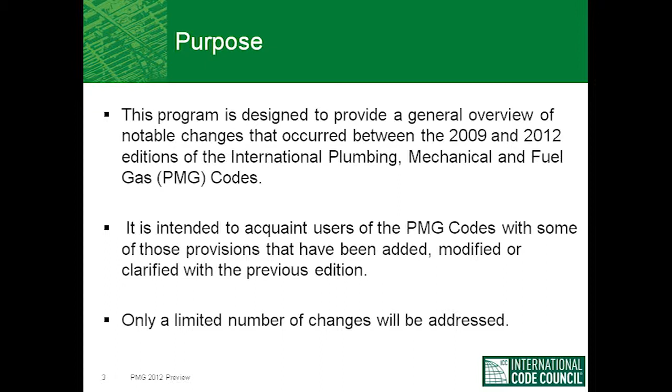This program is designed to provide a general overview of the notable changes that occurred between the 2009 and 2012 editions of the International Plumbing, Mechanical, and Fuel Gas Codes. It is intended to acquaint users of the PMG codes with some of those provisions that have been added, modified, or clarified with the previous edition. Only a limited number of changes will be addressed today.

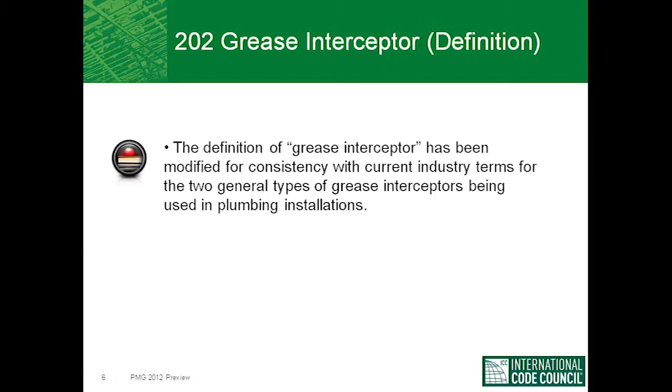In Chapter 2, the definition of grease interceptor has been modified for consistency with current industry terms for the two general types of grease interceptors being used in plumbing installations. The provisions of Section 1003.3.4 addressing grease interceptors and automatic grease removal devices were never intended to apply to gravity grease interceptors. The new terminology now makes a clear distinction between the two types of grease interceptors, hydromechanical and gravity.

The revision to the definition, along with the changes made in Section 1003.3.4, placed the IPC in better alignment with product standards and industry terminology. Both types of grease interceptors require diligent effort by restaurant facility managers and staff to ensure that they are regularly maintained and properly serviced. For a grease collection device to work correctly, it must be properly designed, installed, maintained, and serviced regularly.

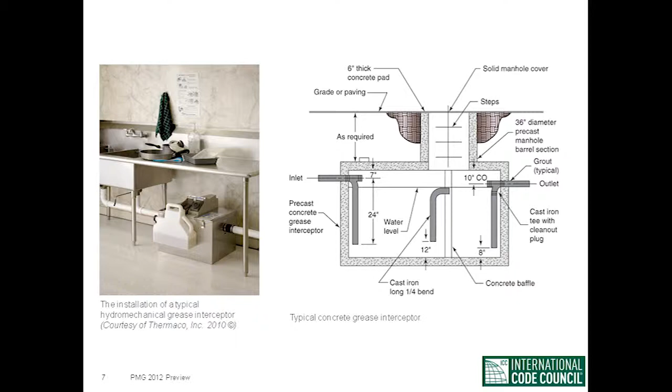The identification requirements for plumbing products and materials have been clarified. The modification to the identification provisions of Section 303.1 clarifies the intent of the code that products and materials shall bear the identification of the manufacturer as well as identification requirements that are referenced by the applicable standard. As a result of the modifications made to Section 303.4, all plumbing products and materials must now be listed by a third-party certification agency. Table 303.4 was deleted as a result of the modifications made to Section 303.4.

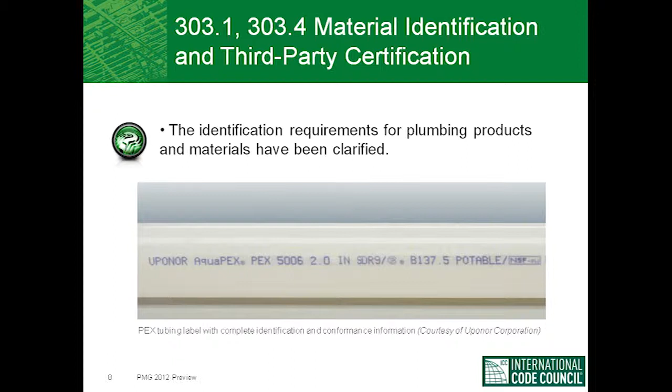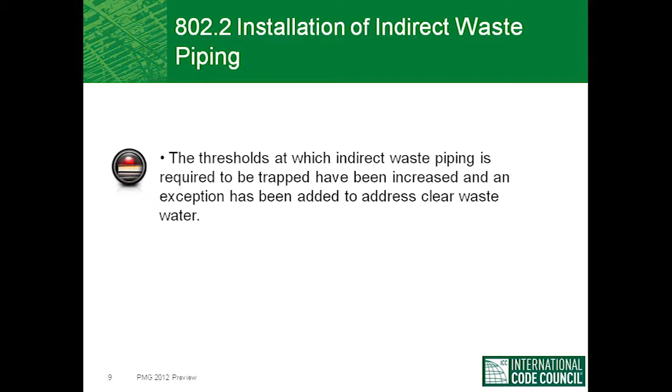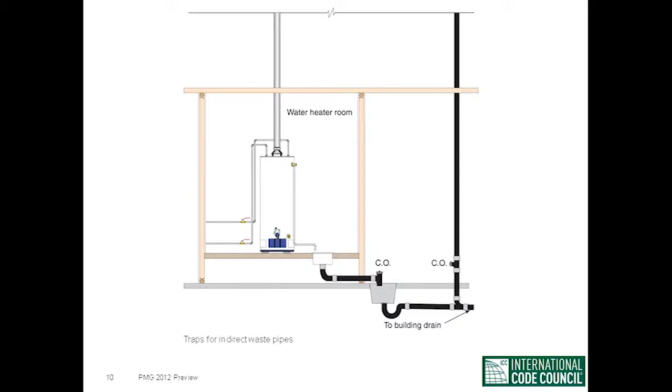In the past, indirect waste piping was required to be trapped where it exceeded 24 inches in horizontal developed length, or 48 inches in total developed length. The justification for increased developed lengths without a trap, 30 inches for a horizontal measurement, and 54 inches in total developed length, is based on Section 1002.1, addressing fixture traps, including the allowance of 30 inches center to center for a combination fixture as permitted in

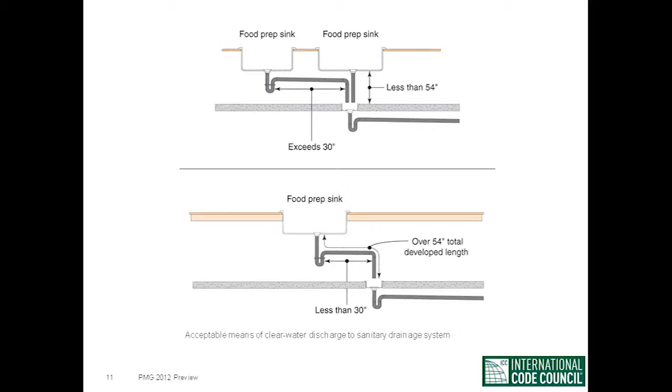exception number 2. A 54-inch total developed length allowance is simply the 30-inch horizontal length allowance plus the 24-inch vertical distance allowed from a fixture to its trap. The changes are considered logical and provide consistency with other allowances in this code.

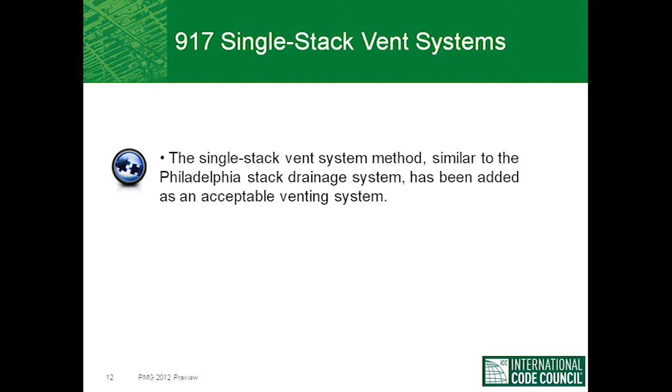The single stack vent system method, similar to the Philadelphia stack drainage system, has been added as an acceptable venting system in the IPC. In a single stack vent system, the drainage stack serves as both a single stack drainage and vent system. The drainage stack shall be sized in accordance with Table 917.2. The stacks shall be uniformly sized based on the total connected drainage fixture unit load. The stack vent shall be the same size as the drainage stack. A 3-inch stack shall serve no more than 2 water closets.

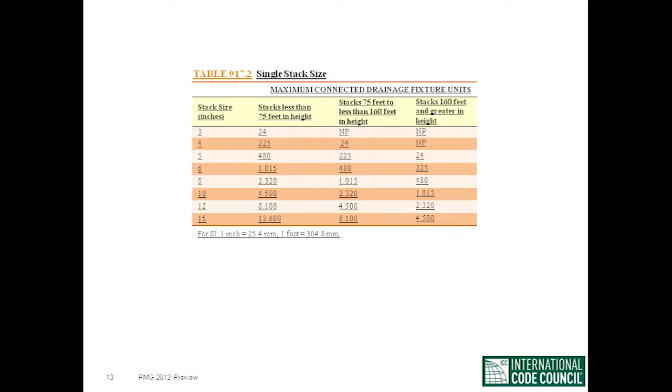The length of trap arms is limited, and the vertical drop from the fixtures is also oversized. Fixture connections that do not meet the requirements for a single stack system must be conventionally vented. Oversized unvented S-traps are the major components of the one-pipe system, instead of the conventionally sized and vented P-traps, and fixtures that allow water to run off after the tap is closed to fill the traps with water to maintain the trap seal. The length of the trap arm is limited to reduce any suction buildup, and the stack is oversized to limit the internal air pressure and vacuum buildup.

Stacks greater than 2 branch intervals in height are prohibited from receiving the discharge from horizontal branches on the lower 2 floors. The separate stack serving the lower 2 floors is required to connect to the building drain at a distance of not less than 10 pipe diameters downstream from the base of the connection of the single stack vented system. This proven method has been laboratory tested to determine sizing and installation requirements that provide proper venting to the drainage system.

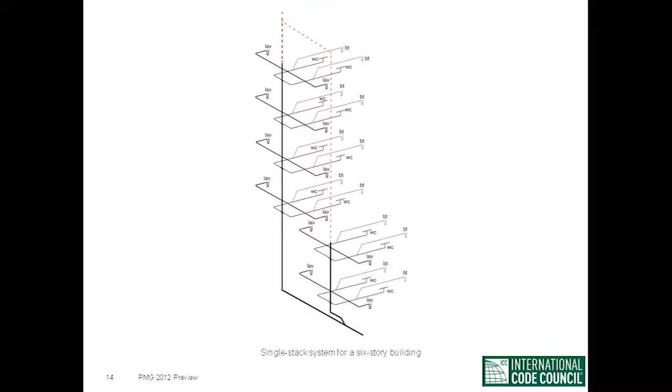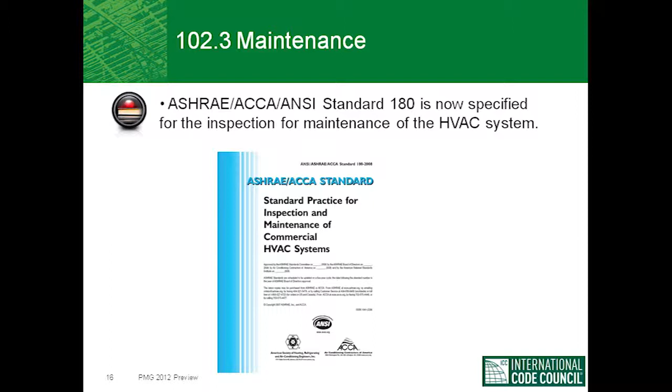Bob Gunther will now take you through some of the significant changes that occurred in the 2012 International Mechanical Code. This section in the 2012 IMC will require mechanical systems to be maintained in accordance with ASHRAE/ACCA/ANSI Standard 180. This will require a maintenance inspection for duct systems, air handlers, chillers, cooling towers, and numerous other components of an HVAC system. The standard also specifies at what intervals these components are to be inspected.

Air dispersion systems have not been recognized in previous codes. They are now acceptable provided they are listed to UL 2518. Reference to that standard has been added to Chapter 15.

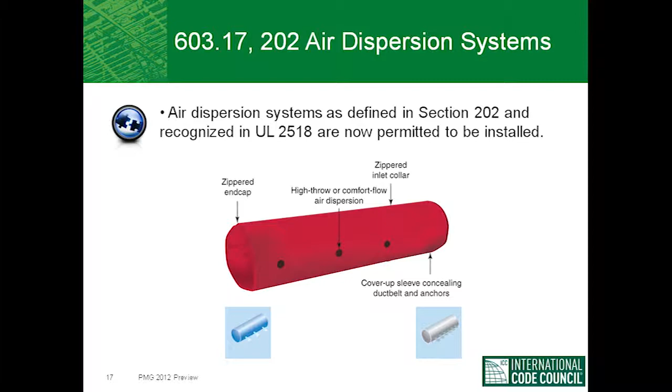The next part of this presentation will cover some of the significant changes that occurred in the 2012 International Fuel Gas Code. A change to Section 404.2 now states that CSST gas piping systems are to be installed in accordance with the terms of their approval, the conditions of listing, the manufacturer's installation instructions, and the provisions of this code.